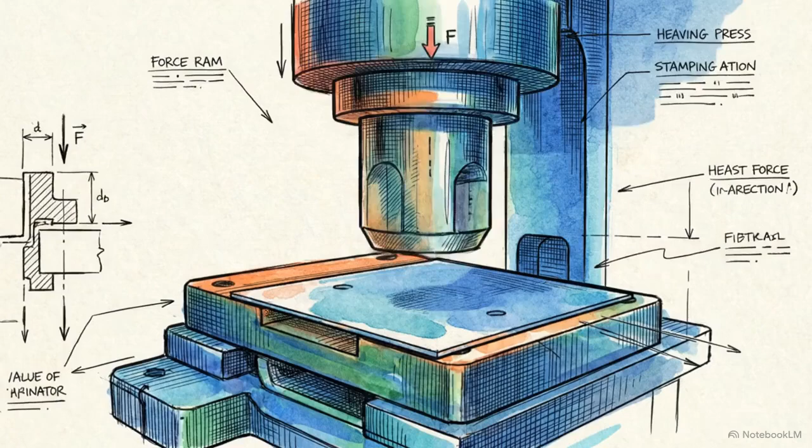In modern hardware manufacturing, survival isn't dictated by the millions you make in revenue. It's dictated by the pennies you save per part. When you are pressing tens of thousands of components, a margin of just a few euros completely decides whether a product lives or dies. To see exactly how engineering and procurement teams navigate this, we are going to look at a real-world case study, an existing hardware component facing severe margin compression from market forces.

This graphic illustrates our current state, the IST price of 40.50 euros. Management's strict target is 35 euros, leaving a deficit of 5.50 euros. This is the value gap.

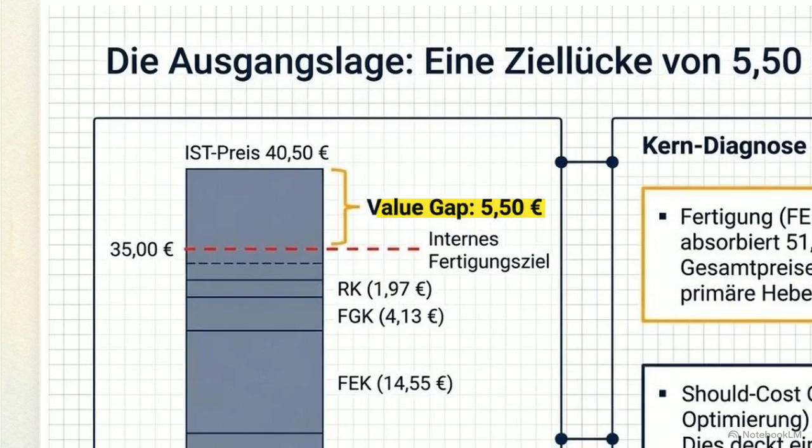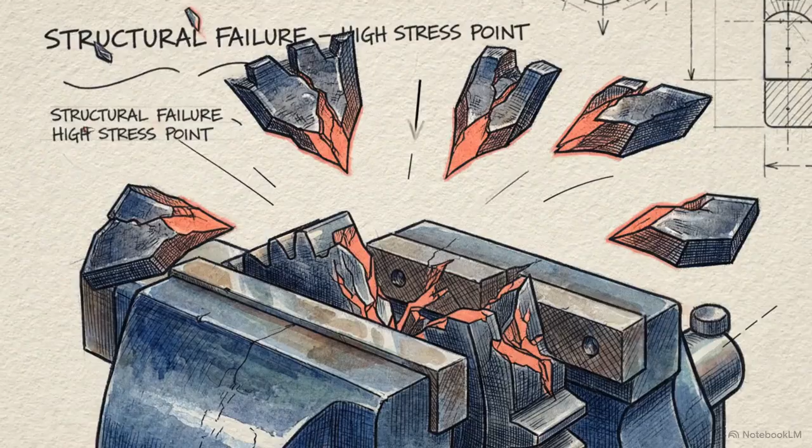The cost breakdown shows exactly where this money is absorbed. The standard corporate reflex here is to simply demand a 15% cost cut across the board. But brute force cost cutting almost always leads to a compromise on material quality, or it severely degrades the component's lifespan. There is a much more rigorous alternative.

The European Standard for Value Management, DIN EN 12973, mathematically rejects the idea of compromising quality for price. Instead of looking at the physical part and asking how to make it cheaper, this standard shifts the optimization target entirely. It asks what the underlying function of the part is and whether that function is actually worth the price you are paying. The methodology to close this €5 gap without losing quality is already proven and documented, but putting it into practice introduces a massive operational bottleneck.

Under a classic value analysis approach, gathering and analyzing all this data takes a team roughly 3 to 6 months to complete. We operate in an industry where procurement cycles and material prices are renegotiated every single quarter. A 6-month diagnostic is too slow, which is why this highly effective standard is frequently abandoned.

We hear constant promises about artificial intelligence fixing supply chains, but AI is virtually useless for precision hardware optimization unless it is constrained by a rigid, engineered scaffold like the DIN standard. By deploying a specialized AI agent within this specific 9-step framework, we aren't replacing the methodology. We are using the AI purely as a compute accelerator to eliminate human latency.

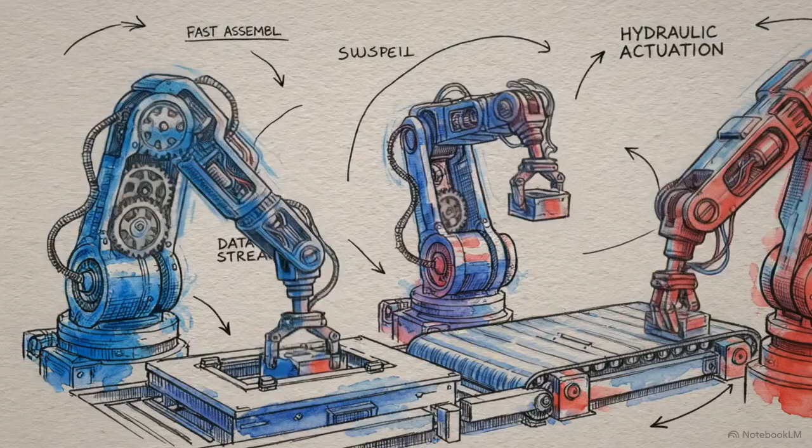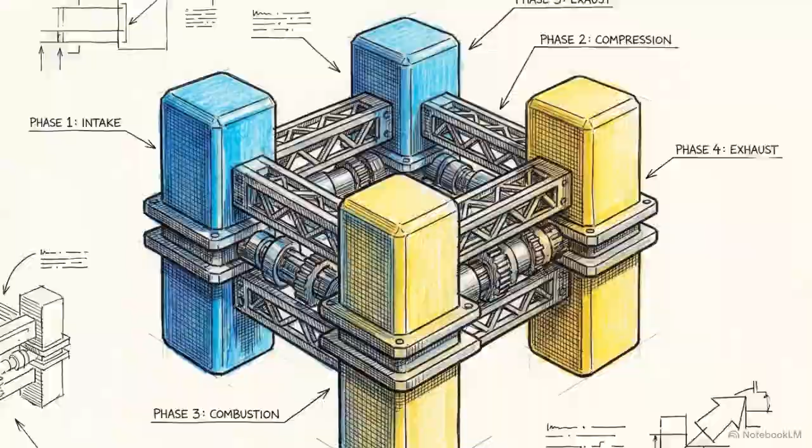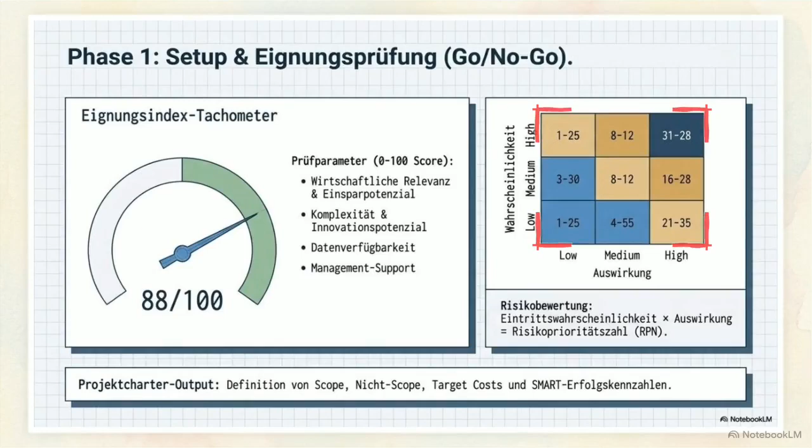The AI executes this through a 4-phase value engine. Phase 1 is preparation and strategic setup. Before human resources are deployed, the agent performs step 0, objective qualification, generating a fitness score of 88. It weighs economic impact, complexity, and data availability, pairing this with a risk priority number matrix for immediate visibility into implementation barriers. Once the project clears this gate, it moves into Phase 2, diagnosis.

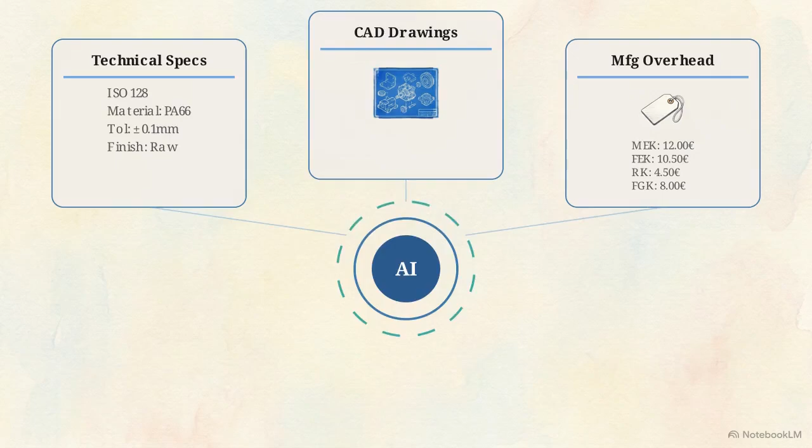The agent automatically runs a Pareto analysis, revealing that exactly 80% of the costs are isolated in just the first 2 subcomponents. This diagnostic phase completely eliminates emotional, departmental debates over where the problem lies. It replaces subjective opinions with a crystal-clear, data-backed cost structure.

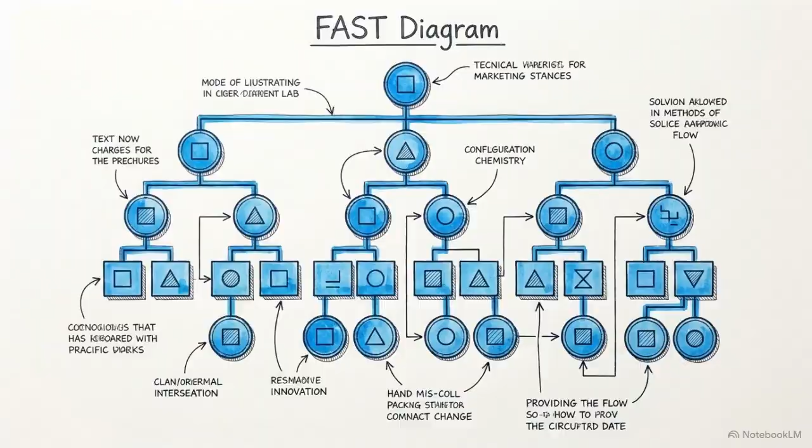With the cost drivers isolated, the agent executes step 4, the FAST diagram, or Function Analysis System Technique. This is the absolute core of the DIN standard. To execute this, the AI forces engineers through a necessary psychological shift. You have to stop looking at the physical geometry of the part and start looking purely at its intent. Under the standard, every single function of the component must be abstracted into a strict grammatical pairing, 1 verb and 1 noun.

Watch how this works. The AI dissolves the physical assembly into a logical tree. It categorizes everything into main functions, secondary functions, and undesired functions.

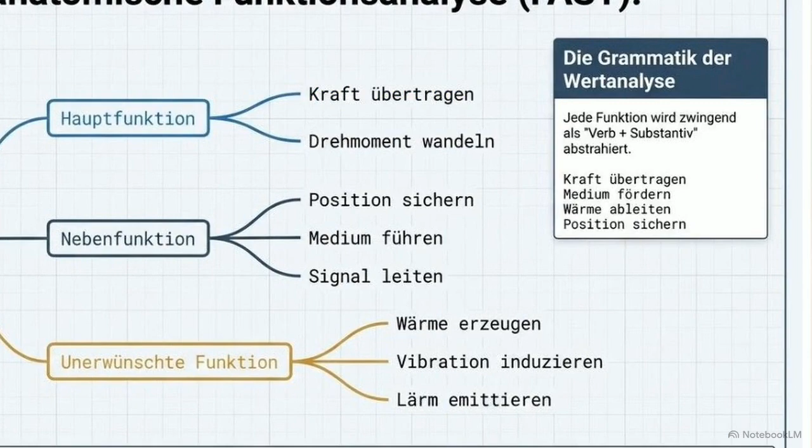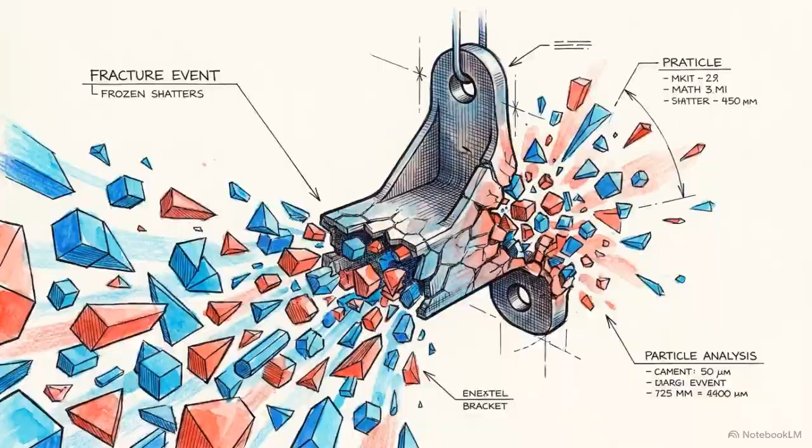Instead of a steel shaft, the system sees transfer power. Instead of a casing, it sees secure position. If you only analyze a physical metal bracket, your brain is constrained by path dependency. You will only ever design a slightly cheaper metal bracket. But by abstracting that bracket into the pure function of securing position, the AI opens the architectural design space to

Only after this overpriced function has been isolated do we move to step 5, the creativity phase. Here, the AI agent shifts from an analytical tool into an innovation engine. It uses the isolated function to instantly generate dozens of potential concepts without any initial prejudice.

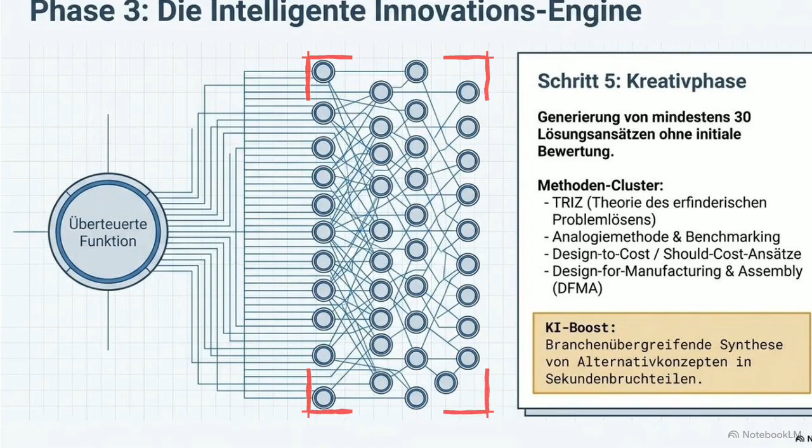To do this, the agent deploys several highly technical methodologies in parallel. It applies the theory of inventive problem solving, TRIZ, while simultaneously running design for assembly constraints. In seconds, the AI scans cross-industry benchmarks to find how other manufacturing sectors have solved this exact verb and noun problem.

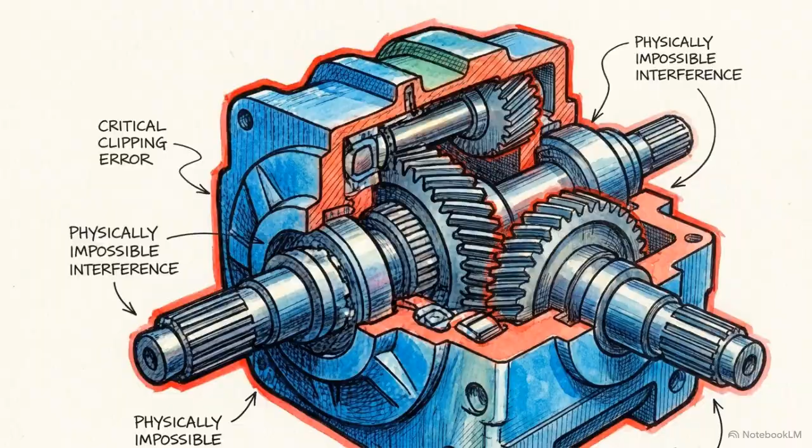Now, this is exactly where standard generative AI usually fails. Left unchecked, a basic AI will hallucinate unmanufacturable, physically impossible designs that look good on paper but fail on the factory floor. Generating 30 new ideas is easy, but identifying the single concept that actually lowers the €40 price tag requires a ruthless, highly objective filter.

That filter is found in steps 6 and 7, the Nutzwertanalyse or utility value analysis, where the agent rigorously scores every generated concept. The AI applies a multidimensional filter to the raw ideas, strictly separating viable, production-ready engineering from AI hallucinations. It evaluates each idea against a battery of uncompromising metrics: technical feasibility, estimated carbon footprint, and real-world time to market. This purely mathematical scoring mechanism strips out subjective bias and departmental pet projects.

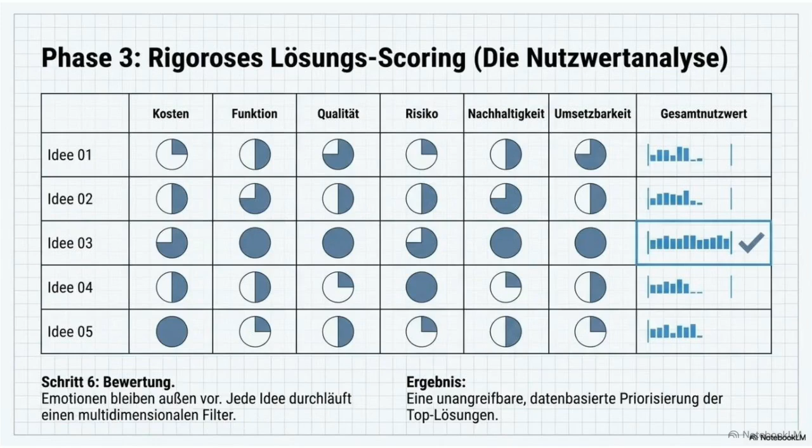The output is a clear, mathematically superior choice. The agent ensures that only solutions possessing a fully validated payback period and a hard return on investment are permitted to advance. This filter acts as an organizational shield. It ensures that capital is only deployed against concepts that are mathematically guaranteed to close the value gap.

We finally reach phase 4, realization. In step 8, the AI agent structures the surviving, validated data into a final executive summary. The output is a revision-proof, norm-compliant report that presents management with a clear, binary choice: implement or pilot the solution based on airtight data. But the agent's utility doesn't end at the presentation.

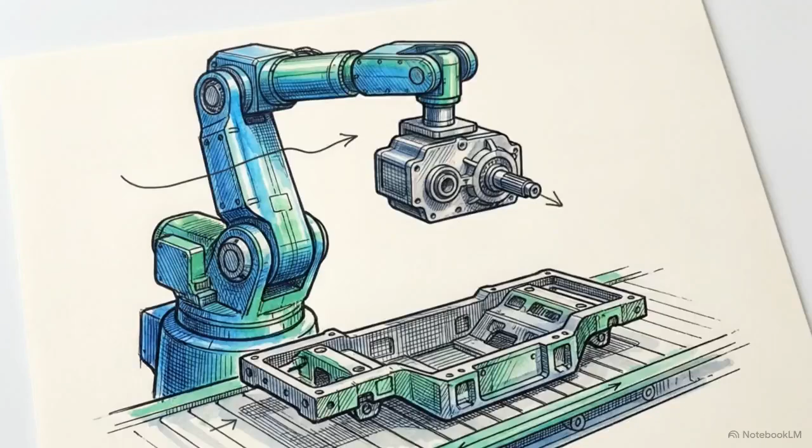In step 9, controlling, the AI transitions into the real-world production phase. Using a KPI cockpit, it actively monitors the implementation over a 12-month timeline. It continuously tracks the realized savings against the forecasted goals. Any deviations are instantly flagged and fed back into the AI agent as lessons learned, creating a compounding intelligence advantage

for every future project. The DIN EN 12973 methodology is in the public domain. Anyone can use it. But by deploying AI agents to execute it, you compress months of complex analysis into days. This gives you the velocity to close critical value gaps and protect your margins before your competitors have even scheduled their first meeting.